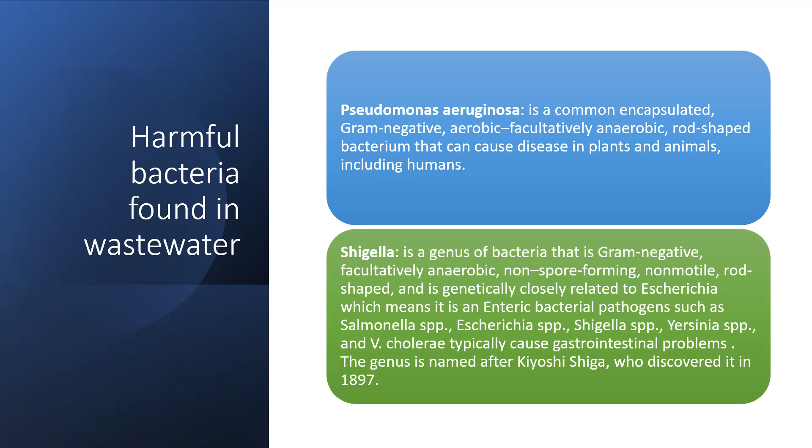So harmful bacteria found in water also can be Pseudomonas. It's a commonly encapsulated, facultatively anaerobic rod-shaped bacterium that can cause diseases in plants and animals, including humans. So forth and so on. More harmful bacteria found in wastewater include coliform bacteria, fecal coliform bacteria, and Escherichia, gram-negative bacteria that are non-spore-forming, which are facultative anaerobic, and closely linked with food poisoning.

Although we have harmful bacteria that are found in water, we also have common microorganisms that are used in wastewater treatment to help treat the waste. That is where we have aerobic bacteria. Those bacteria are used in the wastewater treatment plant in what is known as an aerated environment. This bacterium uses the free oxygen within the water to degrade the pollutants in the wastewater and convert them into energy that it can use to grow and reproduce. For this type of bacteria to be used correctly, it must have oxygen added mechanically. This will ensure the bacteria are able to do their job correctly and continue to grow and reproduce on their food source.

Now, let me introduce you to the Tacoma Central Treatment Plant flow. The city of Tacoma treats the wastewater of more than 220,000 people, with approximately 700 miles of sewer pipes ranging in size from 4 to 72 inches in diameter, and 48 pump stations with capacities up to 20 million gallons per day. This water is conveyed to the North End Treatment Plant and the Central Treatment Plant. The Central Treatment Plant is designed to provide primary treatment and biological secondary treatment using high purity oxygen and a dual digestion system.

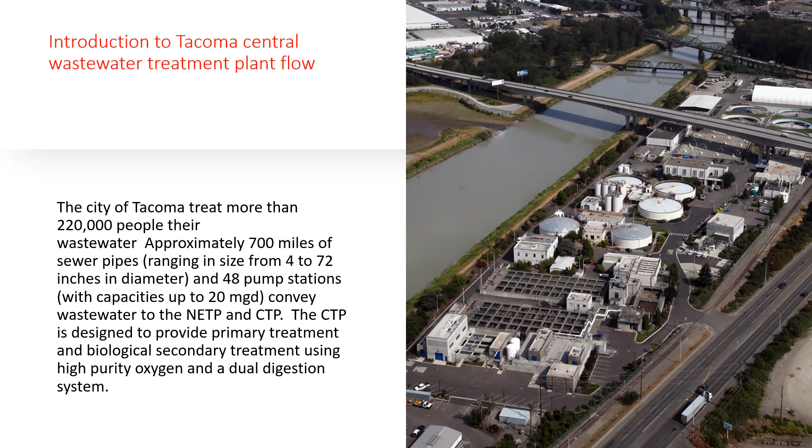Introductions to Central Wastewater Treatment Plant's flow. The Central Treatment Plant has two influent pump stations that lift raw wastewater from the screening facility to the grit removal and wet weather facility. When high flow comes in, we send some part of the water to the wet weather facility to treat it, then blend it into the effluent water and send it to Commencement Bay.

There are 3 variable speed pumps in the new influent pump station and 2 variable speed pumps in the old influent pump station. One of the three NIPS pumps is intended to operate as a backup pump in case of the failure of a NIPS or OIPS. NIPS means new influent pump station, and OIPS means old influent pump station.

At influent flows up to approximately 90 million gallons per day, only the NIPS pumps are online. At flows above approximately 90 million gallons per day, one or both of the OIPS pumps will be online concurrently with the NIPS pumps. The plant influent pumping capacity with the NIPS and the 2 OIPS pumps online is approximately 163 million gallons per

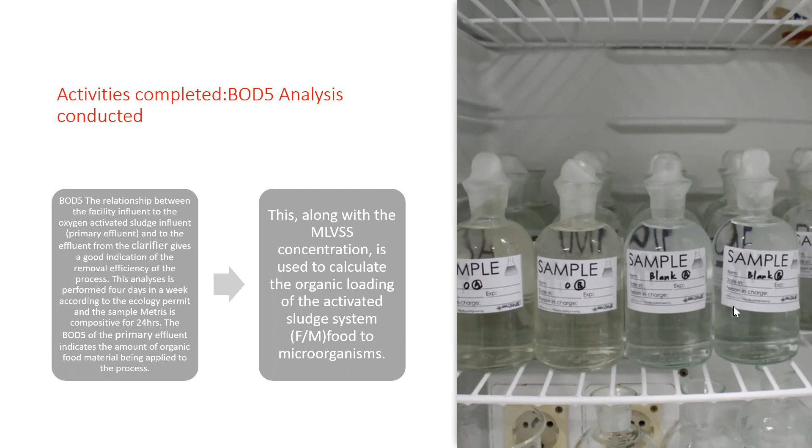Suspended solids. The suspended solids test was conducted daily to determine MLSS and MLVSS, recycle, and influent and effluent suspended solids. The analysis is performed on 24-hour composite samples. This measures how much solids we have, and gives you an idea of how many pounds you're going to bring back into the tank in order to feed the incoming waste. These measures are an indication of effluent quality and final clarifier performance.

So how we know the percentage of solids that we return back to the tank is by the performance of the final clarifier. If we start seeing solids floating on the final clarifier, we're like, okay, something is not right. The MLVSS is also required to determine food to microorganisms. These measures are required for sludge retention time calculations too, so we also use it to calculate sludge retention time.

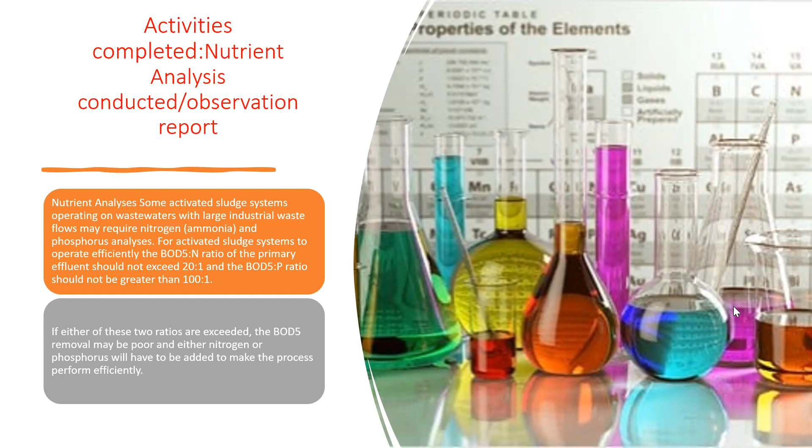Another process observation and analysis that was conducted was the sludge volume index. We use the sludge volume index to know how many pounds of biomass we need to return, and how many pounds we need to waste into the waste activated sludge. The successful operation of an activated sludge system is also dependent on good solid liquid separation.

The SVI is the volume of sludge in milliliters occupied by 1 gram of sludge after 30 minutes of settling in a graduated cylinder test. The settling test of the mixed liquor is done twice daily for SVI measurement. Best results are usually obtained with a 2-liter graduated cylinder and a gentle stirring mechanism, to get proper mixing.

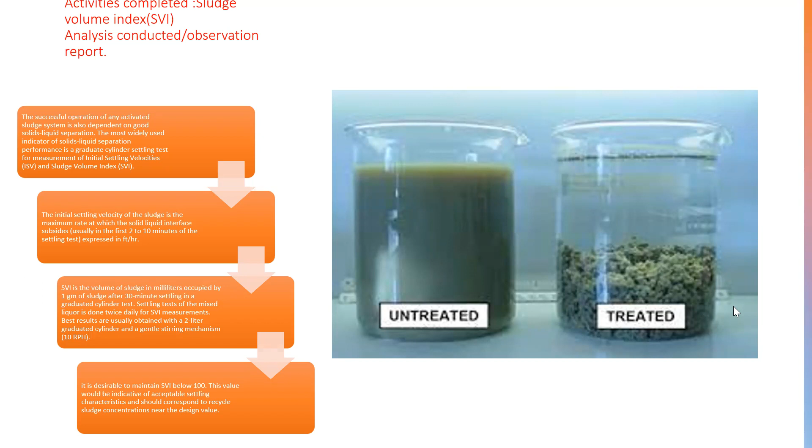All right, so we're doing all these tests, trying to get the results and use the data from the results to make adjustments on our mechanical and hydraulic flow and our return activated sludge.

Another thing that we look into is we grab a sample from the tank, check the mixed liquor sample, and check the characteristics of the microorganisms. What do we have in our tank? What is it that we have that is feeding on the incoming waste? Those are essential observations you need to do all the time, because there are some organisms that you don't want to see in your tank. When you see them early, you try to make adjustments so that the environment will be conducive to the microorganisms that are there.

So a daily microscopic examination of the recycled and mixed liquor sludge is necessary to keep up with the changing microscopic flora. Biological wastewater treatment is a duplication of nature's self-purification process on a faster scale. Therefore, the nature and distribution of the flora is an indication of the state of the process. Those are like the microbial population. Every day, we check the microbial population in that tank.

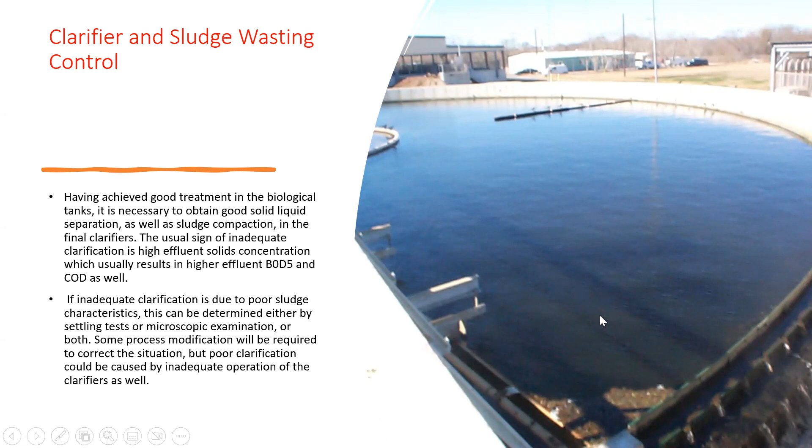So after the final clarifier, after the water separates from the solids and we get a clear supernatant water, the cleared water goes through the chlorine contact tank. So the water that goes through the contact tank gets treated by the use of chlorine. So we use chlorine to disinfect the water.

So the chlorination process in wastewater treatment is one of the most common ways to disinfect wastewater and eliminate pathogens such as E. coli. When added to wastewater, chlorine destroys a target organism by oxidizing its cellular material. So the chlorine reacts with pathogens to satisfy the chlorine demand. The chlorine remaining after the demand is the chlorine residual. The effective destruction of this pathogen by chlorination is dependent on a number of factors, including water temperature, pH, chlorine contact time, turbidity, and concentration of chlorine available after treatment.

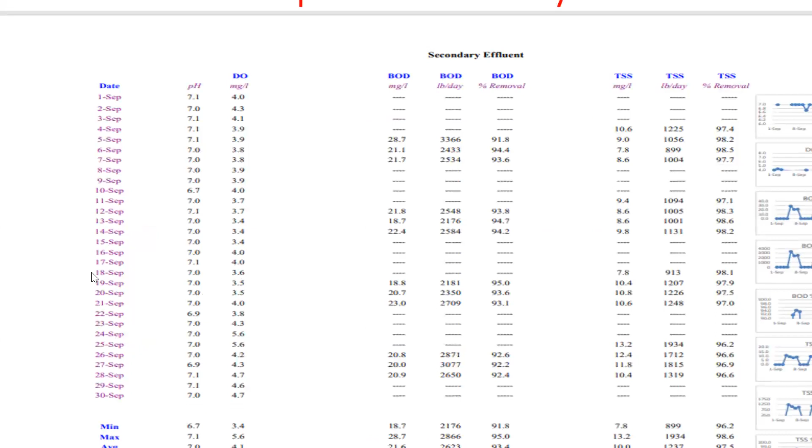Results of the process analysis. These are the results of the process analysis conducted during my APE. So the pH of the water, DO of the water, BOD: influent BOD, primary effluent BOD, effluent BOD, BOD removal. Then the TSS, the MLSS, and the percentage of removal. Some facts.

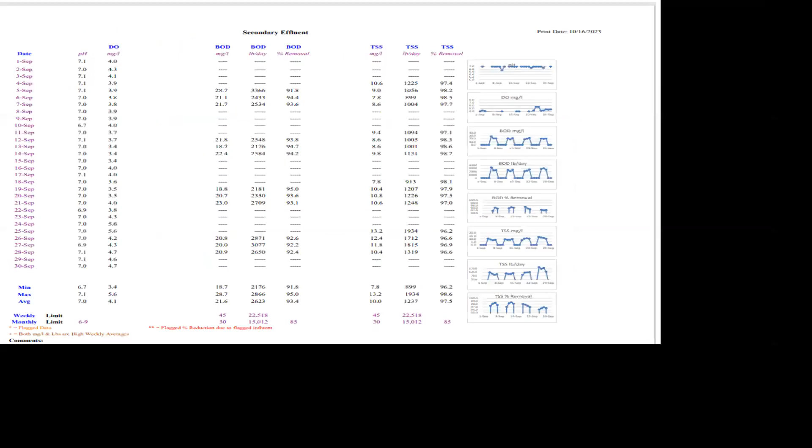Sorry, something is not right.

So, wastewater, right? The result is recorded in the lab sheet for the lab senior to review and submit it for signatory to the plant manager, who submits the permit results in the discharge monitoring report, DMR, to the Department of Ecology. When there is a violation of any of the permit requirements, the plant manager sends a letter to the Department of Ecology,

Environmental Protection Agency, and National Pollutant Discharge Elimination System, NPDES, giving the reasons why the plant did not meet the permit requirement for the weekly, monthly, quarterly, and annual reports. Depends on the permits.

So the City of Tacoma works with these stakeholders, National Pollutant Discharge Elimination System, waste discharge permits, and in compliance with provisions of the State of Washington Water Pollution Control Law, Chapter 90.48, Revised Code of Washington, the Federal Water Pollution Control Act, the Clean Water Act, Title 33 United States Code, Section 1251.

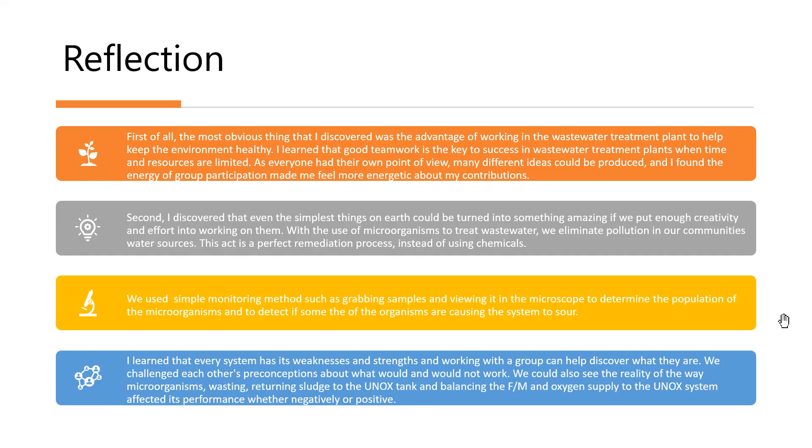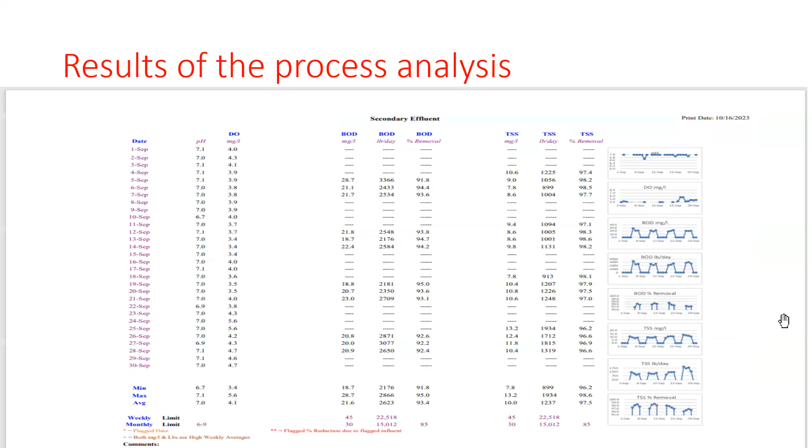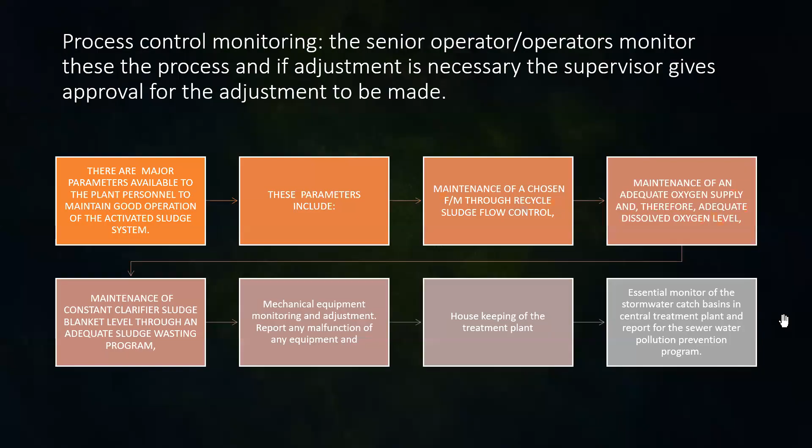So yes, this brings my APE to conclusion, and I was really happy that I was given this opportunity to be part of the process monitoring and process adjustments. And I was able to learn cool things that I didn't know were even possible to do. So yeah.

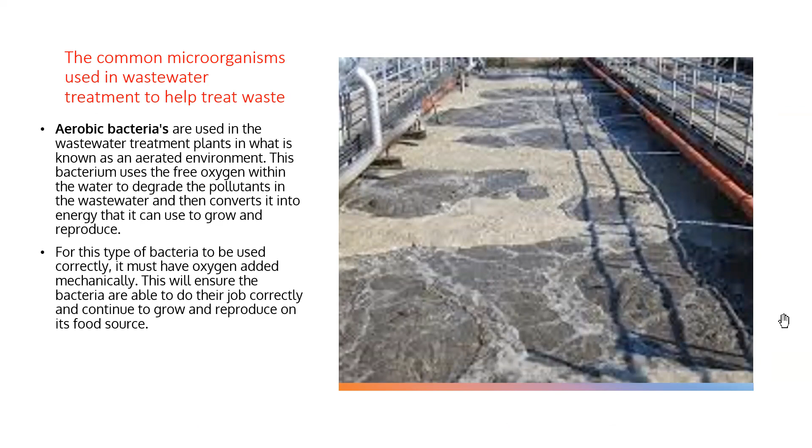But I'm sorry, my accent couldn't allow me to pronounce some words. I tried to speak very slowly, but yeah. So bear with me in that aspect.